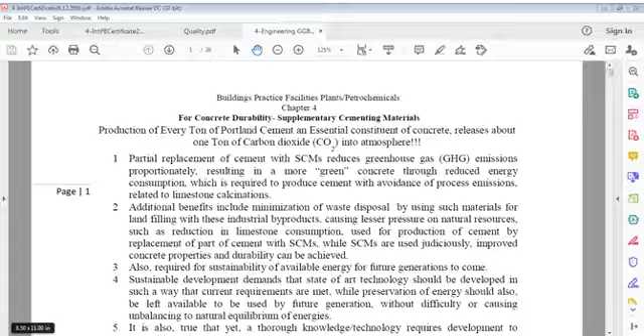COVID is crooked, COVID is a clever entity. It goes to take a cup of tea, takes recess, and goes away for a few days. It comes back again with fresh energy, recharged energy, you can say. When we take a cup of tea for some minutes, for some hour, we feel charged. And that's what COVID does. When it's tired, maybe it goes back to take some coffee or tea, some hot soup, and comes back, and we think it has gone.

But it plays with love. So see, these foolish people, world's foolish people, think it has gone. It's just resting, just trying to sleep for 2 hours, then comes back and attacks you. That's what COVID is doing. We should be clear about that. Well, it's happening. What's happening, nobody can control. No one can control. There's no way we can control this. Whether we control or don't, nothing happens.

Come back to the engineering world. Civil engineering, construction engineering, design engineering, execution engineering, planning engineering, safety engineering, coordination engineering, communication engineering. We have to deal with all these in life. It's not simple engineering, I say. It's social engineering, even in your own daily life. We deal with people, we coordinate with people, we communicate with them. And of course, the computer world has changed everything.

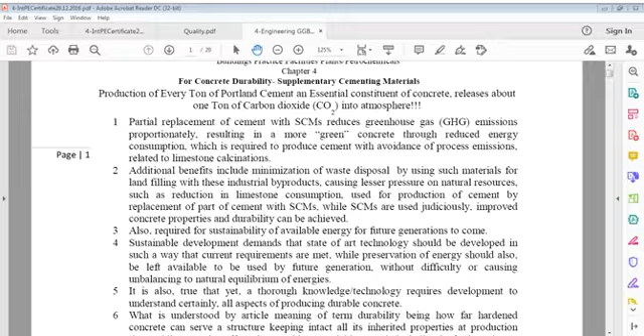Identification may be different, may be difficult, but civil engineering stays there. This point we have to understand very clearly, very well, if you respect civil engineering. People don't like to call themselves civil engineers, they want to call themselves structural engineers. Well, that is, I think, a different kind of mindset.

Engineering for people is important rather than whether you are a structural engineer, or a construction engineer, or a road engineer, or whatever sort of engineer you are. That is your expertise, it doesn't matter. People have to see it that way. People want sound, very strong, durable structures, and that's important.

Your focus should be that, rather than 'I am a structural engineer, I am this engineer, or that engineer'. Well, that's for each individual to see. Important is not your title. Important is your production, your performance.

Performance, as I say, in quality - I can say in quality. Whenever you say what is that, we always say engineering means quality everywhere. When I say quality everywhere, it should be everywhere - not here or there. Everywhere. When I say quality of project, it should be on every member of the project, on every component of the project,

every member of a structure, every discipline of architecture or others in that building or structure. Quality should be everywhere according to requirement, according to contract definitions, according to specifications. Quality must be available everywhere. And it's not only on projects, in life itself there should be quality.

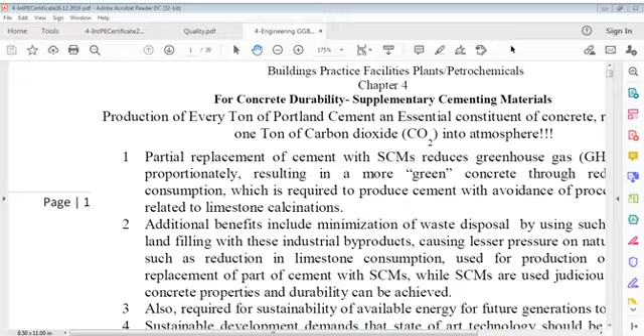And I think it's important, very important. I was talking about yesterday, about supplementary cementing materials. We talked a lot about that, and now accelerators we talked about, fly ash we talked about, and autogenous temperatures, let us say, slump and workability we talked about, and setting time, mechanical properties, strength development, Young's modulus, plasticity, drying shrinkage.

Yes, GGBS, let us say, I think I did not continue this one, right? Let me see, how could I, maybe I remember. Okay, let us talk GGBS now, later.

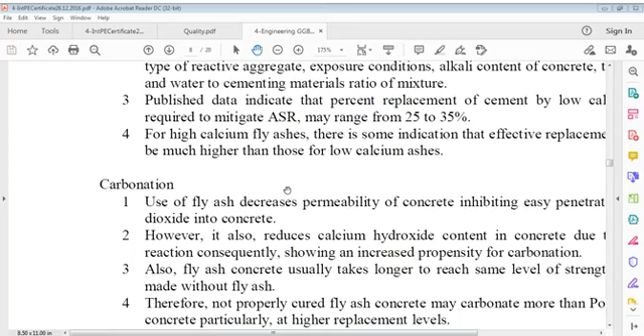We'll talk again on this because this is a very important issue. Let me use this one a little. Let's go back a little. I think I should not run away like this.

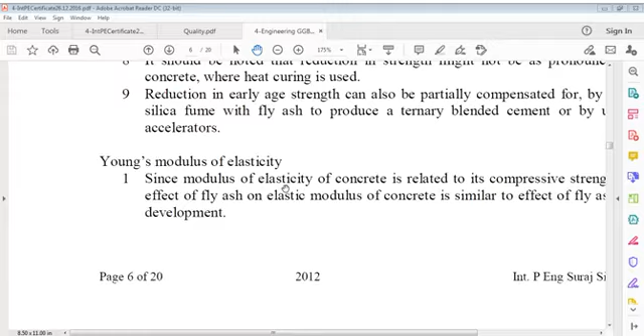Let us say drying shrinkage. Before that, Young's modulus of elasticity. What was it? Strength level, mechanical properties.

Okay, let us read it and go back. What's bleeding? It says bleeding of fly ash concrete depends on the manner in which fly ash is used. When fly ash is used as a direct replacement for cement with no reduction in water content, bleed water of fly ash concrete generally increases. However, when a reduction of water due to use of fly ash as a replacement of cement is made to maintain similar workability, bleed water of resulting fly ash concrete is generally lower than that of concrete made without fly ash. High volume fly ash concrete at low unit water content does not bleed.

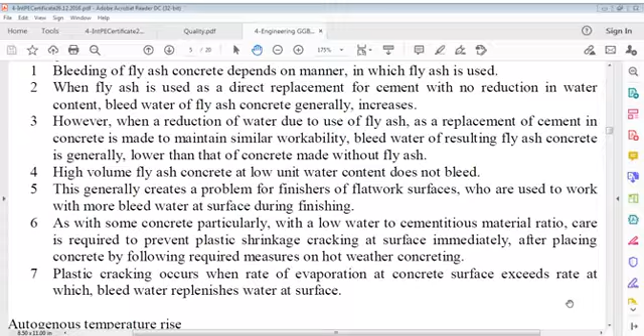This generally creates a problem for those people who work on finishing of surface or flat work surfaces, masons or finishers, who are used to working with more bleed water at the surface during finishing.

As with some concrete, particularly with a low water to cementitious material ratio, care is required to prevent plastic shrinkage cracking at the surface immediately after placing concrete, by following required measures on hot weather concreting. Plastic cracking occurs when the rate of evaporation at the concrete surface exceeds the rate at which bleed water replenishes water at the surface.

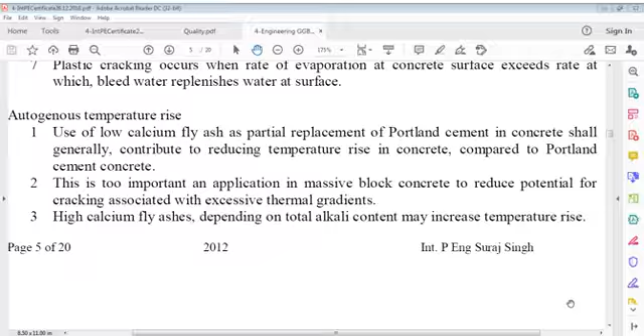Autogenous temperature rise: the use of low calcium fly ash as partial replacement of Portland cement in concrete shall generally contribute to reducing temperature rise compared to Portland cement concrete. This is an important application in massive block concrete, to reduce potential for cracking associated with excessive thermal gradients. High calcium fly ashes, depending on total alkali content, may increase temperature rise. For similar 28 day compressive strength and workability, setting time of fly ash concrete may be longer than normal Portland cement concrete for a given combination of cement and chemical admixtures.

It says for similar 28 day compressive strength and workability attainment, setting time of fly ash concrete may be longer than normal Portland cement concrete for a given combination of cement and chemical admixture. This may influence the schedule for finishing horizontal surfaces, particularly at high levels of replacement if it is more than 30%, and or in cool weather.

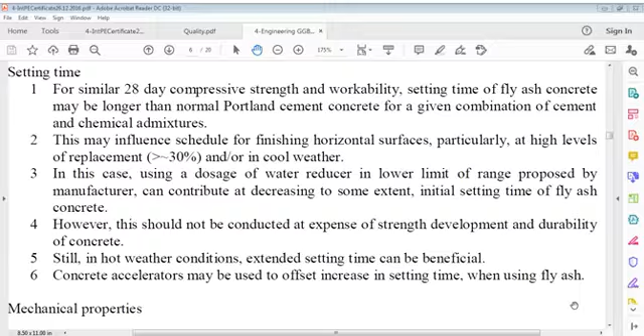In this case, using a dose of water reducer in the lower limit of the range proposed by the manufacturer can contribute to decreasing, to some extent, the initial setting time of fly ash concrete. However, this should not be done at the expense of strength development and durability of concrete. Still, in hot weather conditions, extended setting time can be beneficial. Concrete accelerators may be used to offset increase in setting time when using fly ash.

Now, mechanical properties. Strength development of fly ash concrete is strongly affected by type of fly ash and curing temperature.

Use of low calcium fly ashes generally decreases compressive strength of concrete at early ages up to 28 days, and increases it at later ages due to pozzolanic reaction of fly ash, when compared to Portland cement concrete with similar 28 day compressive strength. On the other hand, use of high calcium content has a marginal effect on strength development.

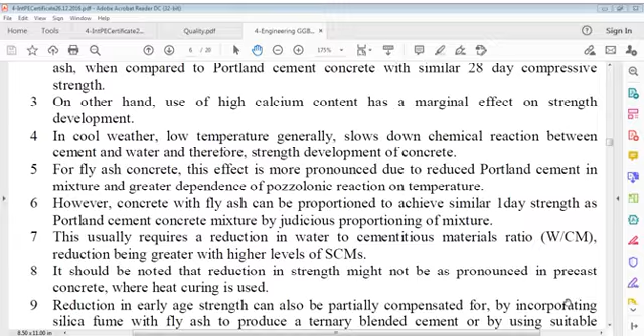In cool weather, low temperature generally slows down the chemical reaction between cement and water, and therefore strength development of concrete. For fly ash concrete, this effect is more pronounced due to reduced Portland cement in the mixture and greater dependence of the pozzolanic reaction on temperature.

However, concrete with fly ash can be proportioned to achieve similar 1-day strength as Portland cement concrete mixture, by judicious proportioning of the mixture. This usually requires a reduction in water to cementitious materials ratio, W/cm, the reduction being greater with a higher level of supplementary cementing materials. It should be noted that this reduction in strength might not be as pronounced in precast concrete where heat curing is used.

Reduction in early age strength can also be partially compensated for by incorporating silica fume with fly ash to produce a ternary blended cement, or by using suitable accelerators. Young's modulus of elasticity: since modulus of elasticity of concrete is related to its compressive strength, in general, the effect of fly ash on elastic modulus of concrete is similar to its effect on strength development.

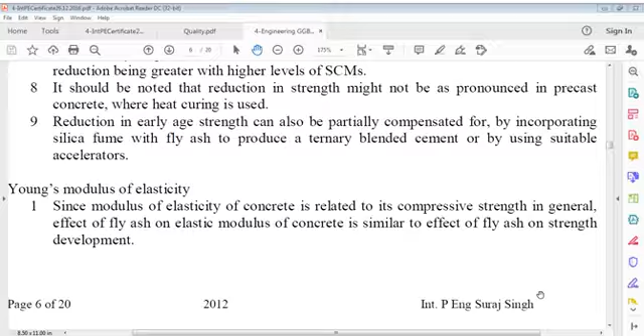Elastic modulus of fly ash concrete is generally lower at early ages, say 28 days, and higher at later ages than that of concrete made without fly ash and having similar 28-day compressive strength.

Drying shrinkage. Effect of fly ash. I'm feeling thirsty, I think. Just a minute, please, let me take some water. I'm feeling thirsty.

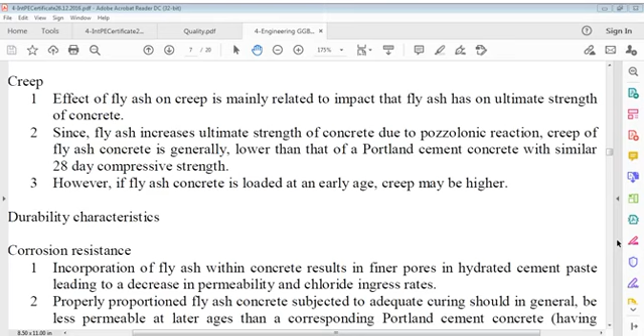Durability. I think you know what is pozzolanic action. We may have a little discussion on that, but let me see if I can find something. Maybe may not be.

Pozzolanic action is a long-term reaction which involves dissolved silicic acid, water, and CaO or Ca(OH)2 or other pozzolans to form a strong cementation matrix. This process is often irreversible. Sufficient amount of free calcium ions, and high pH of 12 are needed.

Pozzolanic reaction overview, let me see. I go to chemical reactions. Just a minute, let us see what happens. It's better sometimes to see, just for refreshing knowledge, it's also important. Modern approaches in material science, chemical reaction pozzolanic concrete. Let us see what it says. I will show you also this better. If you can see this, just for reference only, not for records. I'll just show you something. Let me print out and give it to you. PHP, print out, print, okay.

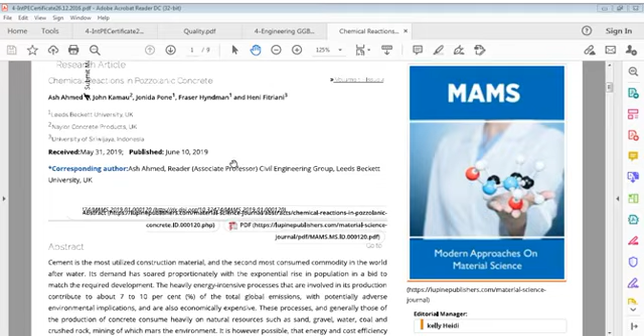So I think I got print out here. This must be somewhere here. Let us see what it says. Let me go through this and see what this you mean by that. It's some material, we'll just read this one better, I think. So anytime we can see this, let us talk on this, and I close other files, otherwise I may find problems, let me see which files are open so that I can close those unnecessary files here. I'll close this and come on to talk to you of this. This is also, there's no meaning of this PHP, so I'll depend on this now. Let us see this, okay, it is which site?

Chemical reactions in concrete, modern approaches, it says cement is most utilized construction material and second most consumed commodity in world after water. Its demand has soared proportionally with exponential rise in population in a bid to match required development. Heavy energy intensive processes that are involved in its production contribute to about 7 to 10% of total global emissions.

With potentially adverse environmental implications, these processes are also economically expensive. These processes, and generally those of production of concrete, consume heavily on natural resources such as sand, gravel, water, coal, and crushed rock, mining of which mars environment. It is, however, possible that energy and cost efficiency can be achieved by reducing amount of clinker and in its place utilizing supplementary cementitious materials, SCMs or pozzolanas, that require less process heating and emit fewer levels of carbon dioxide.

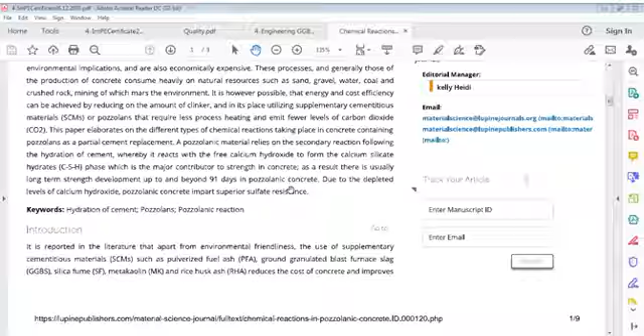In this hydration of cement, pozzolanas are important. It is reported in literature that apart from environmental friendliness, use of supplementary cementitious materials such as pulverized fuel ash (PFA), ground granulated blast furnace slag (GGBS), silica fumes (SF), metakaolin (MK), and rice husk ash (RHA) reduces cost of concrete and improves durability of hardened concrete, thereby enhancing service life of structure.

This focuses on chemical reactions which happen in pozzolanic concrete, that is concrete containing PFA, SF, MK and RHA.

Cement is deemed to have a considerably high carbon footprint, contributing immensely to global anthropogenic carbon dioxide.

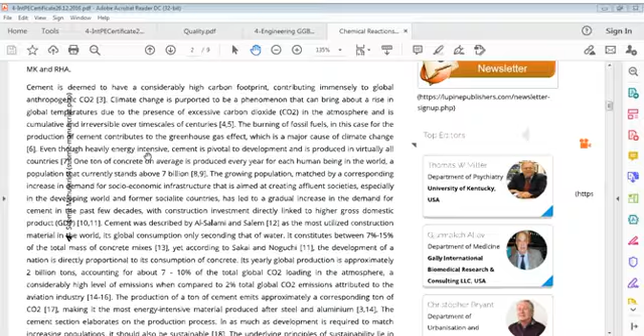Climate change is purported to be a phenomenon that can bring about a rise in global temperature due to presence of excessive carbon dioxide in the atmosphere, and is cumulative and irreversible over time scales of centuries. Burning of fossil fuels, in this case for production of cement, contributes to greenhouse gas effect, which is a major cause of climate change.

Even though heavily energy intensive, cement is pivotal to development and is produced in virtually all countries. On average, 1 ton of concrete is produced every year for each human being in the world. What does 1 ton of concrete mean?

Concrete is 2.5 tons per cubic meter. This means 40% of 1 cubic meter of concrete is produced on average every year for each human being in the world.

A population that currently stands around 7 to 8 billion, a growing population matched by a corresponding increase in demand for socio-economic infrastructure aimed at creating an affluent society, especially in the developing world and former socialist countries, has led to a gradual increase in demand for cement in past few decades, with construction investment directly linked to higher gross domestic product (GDP).

Cement was described by Al-Salami and Salem as the most utilized construction material in the world, its global consumption only seconding that of water. It constitutes between 7 to 15% of the total mass of concrete mixes.

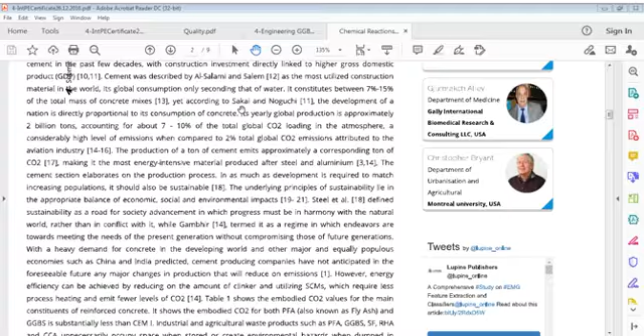Production of a ton of cement emits approximately a corresponding ton of carbon dioxide, making it the most energy intensive material produced after steel and aluminium. The cement section elaborates on the production process.

Inasmuch as development is required to match increasing populations, it should also be sustainable. This principle of sustainability lies in an appropriate balance of economic, social and environmental impacts. Steel et al. defined sustainability as a road for society to advance in which progress must be in harmony with the natural world rather than in conflict with it.

While Gambhir termed it as a regime in which endeavors are towards meeting the needs of the present generation without compromising those of future generations, with a heavy demand for concrete in the developing world and other major and equally populous economies such as China and India predicted, cement producing companies have not anticipated in the foreseeable future any major changes in production that will reduce emissions. However, energy efficiency can be achieved by reducing the amount of clinker and utilizing SCMs, which require less process heating and emit fewer levels of carbon dioxide.

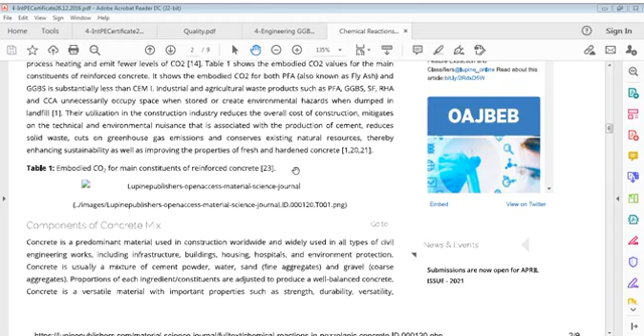There's a table showing embodied carbon dioxide for PFA (fly ash) and GGBS is substantially less than CEM. Industry and agricultural waste products such as PFA, GGBS, RHA, and CCA unnecessarily occupy space when stored or create environmental hazards when dumped in landfill. Their utilization in construction reduces overall cost of construction, mitigates technical and environmental nuisance associated with cement production, reduces solid waste, cuts greenhouse gas emissions, and conserves natural resources, enhancing sustainability and improving properties of fresh and hard concrete.

Concrete is a predominant material used in construction worldwide and widely used in all types of civil engineering works, including infrastructure, buildings, housing, hospitals, and environment protection. Concrete is usually a mixture of cement powder, water, sand (fine aggregate), and gravel (coarse aggregate). Proportions of each ingredient are adjusted to produce a well-balanced concrete. Concrete is a versatile material with important properties such as strength, durability, versatility, affordability, fire resistance, and thermal mass. Furthermore, it's locally produced and utilized in all countries.

The most common type of cement, used in combination with other materials to form different types of concrete, is Portland cement. Portland cement is produced by burning a mixture of calcium carbonate, called limestone or chalk, and an aluminosilicate, that's clay or shale. The product is then ground with approximately 5% gypsum to produce cement. Cement is a material which binds together solid bodies, or aggregate, by hardening from a plastic state.

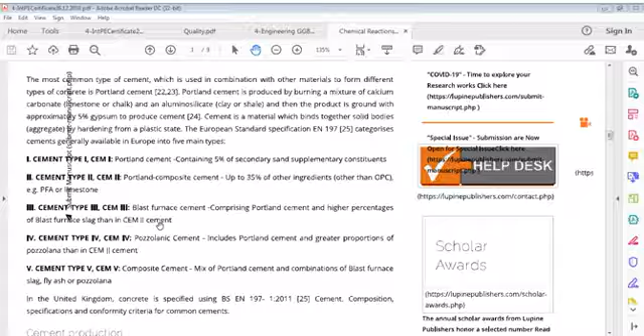European standard specification EN197 categorizes cement generally available in Europe into 5 main types: type 1 cement, type 2 cement, type 3 cement, and so on.

Type 1 is Portland cement containing 5% secondary supplementary constituents. Type 2, or CEM 2, is Portland composite cement with up to 35% of other ingredients besides OPC, such as PFA or limestone. Cement type 3 is blast furnace cement, comprising Portland cement with higher percentages of blast furnace slag than CEM 2. Cement type 4 is pozzolanic cement, including Portland cement with greater portions of pozzolana than CEM 2. Cement type 5 is composite cement, a mix of Portland cement with combinations of blast furnace slag, fly ash, and pozzolana.

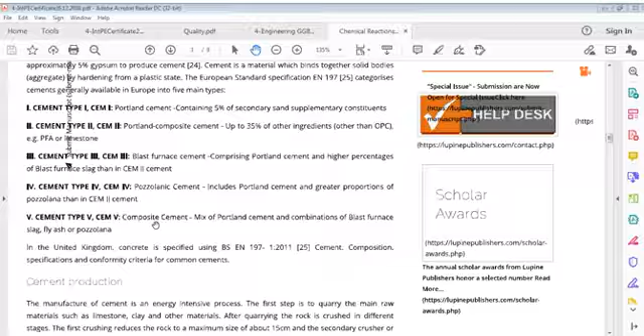So these are the 5 types: Cement 1 contains just 5% secondary sand. Cement 2 is Portland cement comprising 35% ingredients other than OPC. Type 3 is blast furnace slag cement, with higher percentages of blast furnace slag. Cement 4 is pozzolanic cement, with greater proportions of pozzolana than cement 2. Cement type 5 is composite cement, a mix of Portland cement with blast furnace slag, fly ash, and pozzolana. In the United Kingdom, concrete is specified using BS EN 197, which covers cement composition, specifications, and conformity criteria for common cements.

Manufacture of cement is an energy intensive process. The first step is to quarry the main raw materials such as limestone, clay, and other materials. After quarrying, the rock is crushed in different stages: first crushing reduces rock to a maximum size of about 15 centimeters, and a secondary crusher or hammer mill reduces it further to about 7.5 centimeters or smaller.

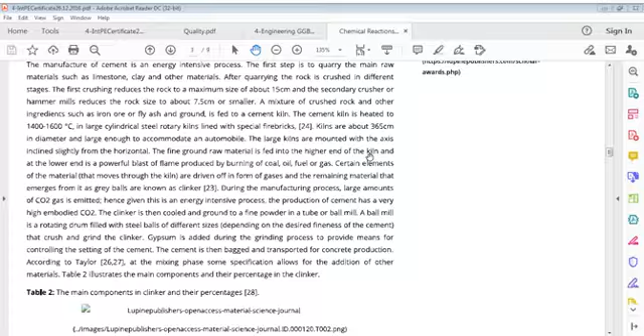A mixture of crushed rock and other ingredients such as iron ore or fly ash is ground and fed into a cement kiln. The kiln is heated to 1400 to 1600 degrees Celsius in large cylindrical steel rotary kilns lined with special fire bricks. Kilns are about 365 centimeters in diameter, large enough to accommodate an automobile, and mounted with their axis inclined slightly from horizontal. Fine ground raw material is fed into the higher end of the kiln, and at the lower end is a powerful blast of flame produced by burning coal, oil, fuel, or gas.

Certain elements of the material moving through the kiln are driven off as gases, and the remaining material that emerges as grey balls is known as clinker. During this manufacturing process, large amounts of carbon dioxide gas are emitted. Hence, given this energy intensive process, production of cement has a very high embodied carbon dioxide footprint. The clinker is then cooled and ground to fine powder in a tube or ball mill.

The ball mill is a rotating drum filled with steel balls of different sizes, depending on the desired fineness of cement, that crush and grind the clinker. Gypsum is added during the grinding process to provide a means for controlling the setting time of cement. The cement is then bagged and transported for concrete production. According to Taylor, at the mixing phase, some specifications allow for the addition of other materials.

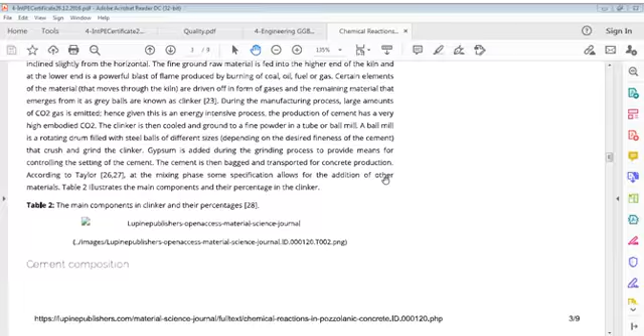There are four main chemical compounds present in Portland cement whose proportions in the mix affect the properties of the resulting cement. These compounds are tricalcium silicate, dicalcium silicate, tricalcium aluminate and tetracalcium aluminoferrite. Their properties are shown in the table, the typical composition of Portland cement.

Tricalcium silicate, C3S: water reacts rapidly with it to produce a large amount of heat, an exothermic reaction, forming calcium silicate hydrates. These have high strength and contribute most to the early strength of cement hydrates.

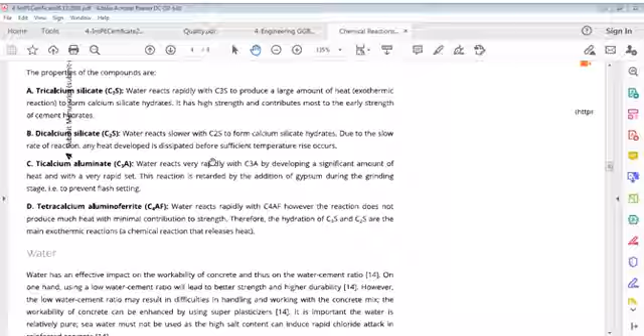Dicalcium silicate, C2S: water reacts slower with C2S to form calcium silicate hydrates. Due to the slow rate of reaction, whatever heat is developed is dissipated before a sufficient temperature rise occurs.

Tricalcium aluminate, C3A: water reacts very rapidly with C3A, developing a significant amount of heat and a very rapid set. This reaction is retarded by the addition of gypsum during the grinding stage to prevent flash setting.

Tetracalcium aluminoferrite, C4AF: water reacts rapidly with C4AF, however the reaction doesn't produce much heat, with minimal contribution to strength.

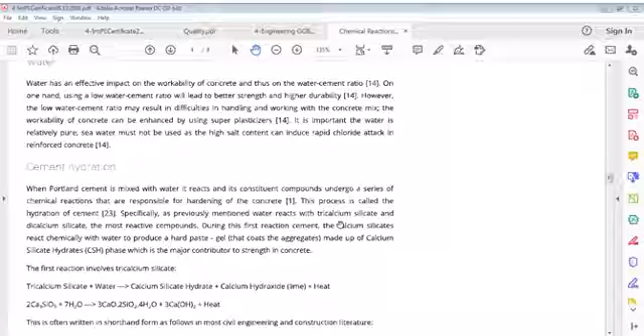Water has an effective impact on the workability of concrete and thus on the water cement ratio. Using a low water cement ratio leads to better strength and higher durability, however it may result in difficulties handling and working with the concrete mix. Workability can be enhanced using superplasticizers. It is important that water is relatively pure; seawater must not be used as high salt content can induce rapid chloride attack in reinforced concrete.

When Portland cement is mixed with water, it reacts and its constituent compounds undergo a series of chemical reactions responsible for the hardening of concrete. This process is called hydration of cement. Specifically, water reacts with tricalcium silicate and dicalcium silicate, the most reactive compounds.

During this first reaction, calcium silicate reacts chemically with water to produce a hard paste gel that coats the aggregate, made up of calcium silicate hydrates phase, which is the major contributor to the strength of concrete.

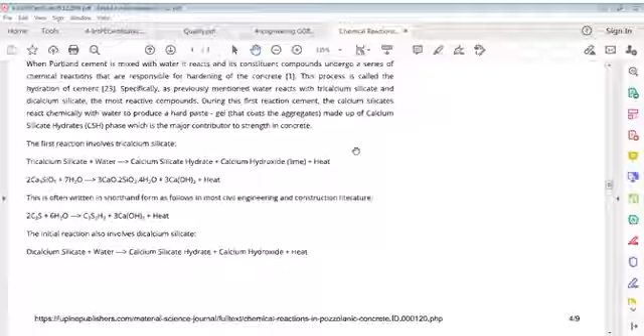The first reaction involves tricalcium silicate: tricalcium silicate plus water gives calcium silicate hydrate plus calcium hydroxide (lime) plus heat. That is 2Ca3SiO5 plus 7H2O gives 3CaO·2SiO2·4H2O plus 3Ca(OH)2 plus heat. This is often written in shorthand form as follows, in most civil engineering and construction literature: 2C3S plus 6H2O gives C3S2H3 plus 3CH plus heat.

The initial reaction also involves dicalcium silicate: dicalcium silicate plus water gives calcium silicate hydrate plus calcium hydroxide plus heat. That is 2Ca2SiO4 plus 5H2O gives 3CaO·2SiO2·4H2O plus Ca(OH)2 plus heat, often written in shorthand form as: 2C2S plus 4H2O gives C3S2H3 plus CH plus heat.

During hydration of cement, there is also formation of lime, calcium hydroxide. Both reactions are exothermic, meaning heat is released during the reaction process.

Tricalcium silicate and dicalcium silicate are the main contributors to compressive strength in concrete.

According to Darwin, when tricalcium silicate is first mixed with water, for the first 15 minutes a rapid evolution of heat occurs, known as stage 1. Then for the next 2 to 4 hours follows a relative inactivity known as the induction or dormant period. Portland cement concrete remains in a plastic state for several hours due to this prolonged phase of inactivity.

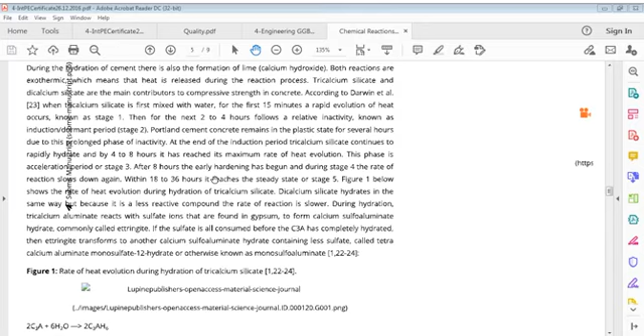At the end of the induction period, tricalcium silicate continues to rapidly hydrate, and by 4 to 8 hours it reaches its maximum rate of heat evolution. This phase is the acceleration period, or stage 3. After 8 hours, early hardening has begun, and during stage 4 the rate of reaction slows down again. Within 18 to 36 hours, it reaches steady state, or stage 5.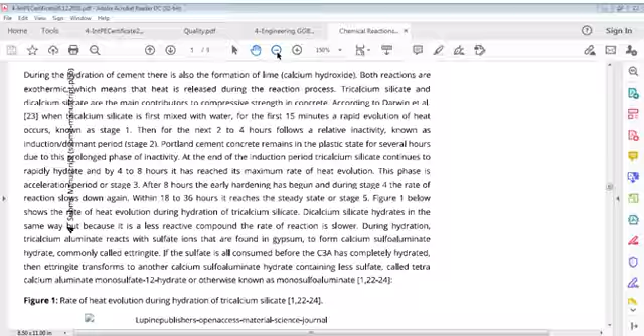So I was talking about this issue during hydration of cement. Here's an interesting statement: formation of lime, that is hydration of cement and water, forms calcium hydroxide, CH. Both reactions are exothermic, meaning heat is released during the reaction process. Tricalcium silicate and dicalcium silicate are the main contributors.

Tricalcium silicate and dicalcium silicate are the main contributors for compressive strength. When tricalcium silicate is first mixed with water, for the first 15 minutes they combine and rapid evolution of heat occurs, known as stage 1.

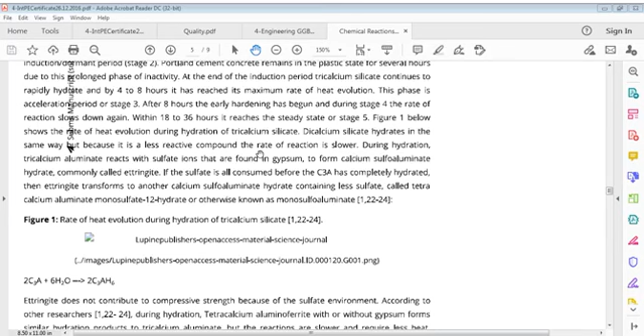I will not go into further detail since that's not the objective of this talk, but you can see that 2C3A plus 6H2O goes to 2C3AH6. Ettringite does not contribute to compressive strength, because of the sulfate environment.

According to other researchers, during hydration tetracalcium aluminoferrite, with or without gypsum, forms hydration products similar to tricalcium aluminate, but the reactions are slower and require less heat. Concrete containing 100% cement usually reaches its maximum strength within 28 days, hence this is usually taken as the reference point for most projects using concrete.

Most supplementary cementing materials, SCMs, are pozzolans. However, it's important to differentiate between a direct cement replacement and a pozzolan. A direct cement replacement is a type of cement substitute that can replace Portland cement without requiring the pozzolanic activity reaction discussed below. The most common type of these replacements is ground granulated blast furnace slag, GGBS, which is a byproduct of the iron and steel industry.

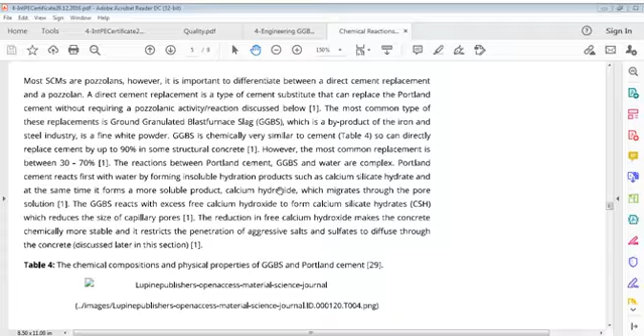GGBS is a fine white powder, chemically very similar to cement, so you can directly replace cement by up to 90% in some structural concrete. However, the most common replacement is between 30 to 70%.

Reactions between Portland cement, GGBS and water are complex. Portland cement reacts first with water, forming insoluble hydration products such as calcium silicate hydrate, and at the same time forms a more soluble product, calcium hydroxide, which migrates through the pore solution. GGBS reacts with the excess free calcium hydroxide.

Again: Portland cement reacts first with water, forming insoluble hydration products such as calcium silicate hydrate, and at the same time forms a more soluble product, calcium hydroxide, which migrates through the pore solution. GGBS reacts with the excess free calcium hydroxide to form calcium silicate hydrates, CSH, which reduces the size of the capillary pores.

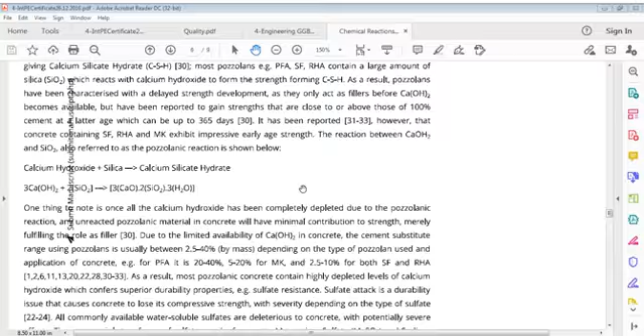The reaction between Ca(OH)2 and SiO2, also referred to as the pozzolanic reaction, is shown below: calcium hydroxide plus silica gives calcium silicate hydrate - 3Ca(OH)2 plus 2SiO2 gives 3CaO, 2SiO2, 3H2O.

One thing to note is that once all calcium hydroxide has been completely depleted due to the pozzolanic reaction, unreacted pozzolanic material in concrete will have minimal contribution to strength, merely fulfilling the role of a filler.

Due to limited availability of Ca(OH)2 in concrete, cement substitute range using pozzolanas is usually between 2.5 to 40% by mass, depending on type of pozzolana used and application of concrete. For PFA it is 20 to 40%, 5 to 20% for MK (metakaolin), and 2.5 to 10% for both silica fumes and RHA.

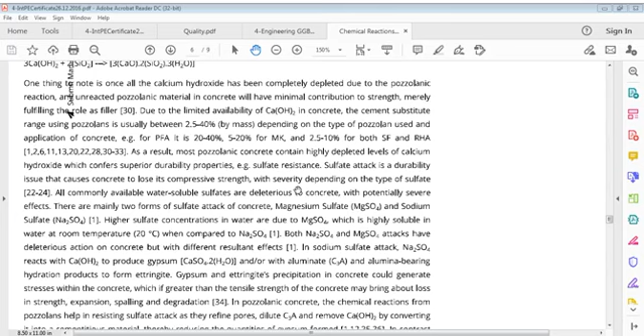As a result, most pozzolanic concrete contain highly depleted levels of calcium hydroxide, which confers superior durability properties, namely sulfate resistance.

Sulfate attack is a durability issue that causes concrete to lose its compressive strength, with severity depending on type of sulfate. All commonly available water-soluble sulfates are deleterious to concrete with potentially severe effects.

There are mainly two forms of sulfate attack on concrete: magnesium sulfate MgSO4 and sodium sulfate Na2SO4. Higher sulfate concentrations in water are due to MgSO4, which is highly soluble in water at room temperature, 20 degrees Celsius, when compared to Na2SO4. Both Na2SO4 and MgSO4 attacks have deleterious actions on concrete, but with different resultant effects.

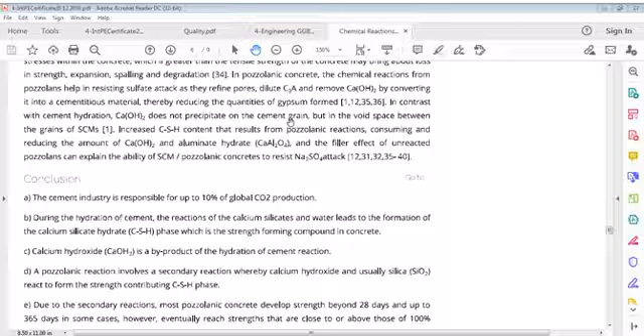The conclusion here, a small conclusion, is that the cement industry is responsible for up to 10% of global carbon dioxide production.

During hydration of cement, reactions of calcium silicates and water lead to formation of calcium silicate hydrate (CSH) phase, which is the strength-forming compound in concrete. Calcium hydroxide Ca(OH)2 is a byproduct of the hydration of cement reaction.

A pozzolanic reaction involves a secondary reaction whereby calcium hydroxide and usually silica (SiO2) react to form strength-contributing CSH phase. Due to secondary reactions, most pozzolanic concrete develops strength beyond 28 days and up to 365 days in some cases, eventually reaching strengths close to or above those of 100% cement.

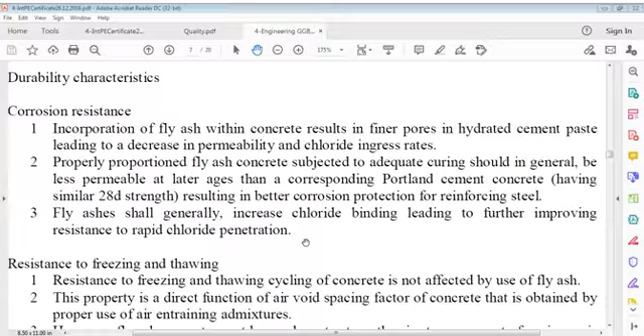Resistance to freezing and thawing cycling of concrete is not affected by use of fly ash. This property is a direct function of the air void spacing factor of concrete, obtained by proper use of air entraining admixtures. Fly ash concrete must have adequate strength prior to exposure to freezing, as is the case for normal Portland cement concrete.

Resistance to de-icing salts scaling: laboratory test data indicates that fly ash concrete containing more than about 25% fly ash is less resistant to de-icing salt scaling than Portland cement concrete. However, some field data have shown acceptable performance of concrete incorporating more than 40 to 50% fly ash.

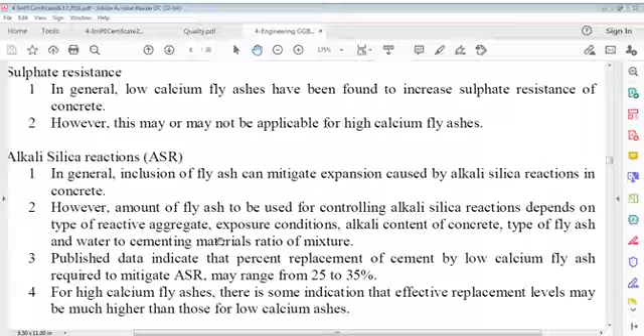Sulfate resistance: in general, low calcium fly ashes have been found to increase sulfate resistance of concrete. However, this may or may not be applicable for high calcium fly ashes.

Alkali silica reactions: in general, inclusion of fly ash can mitigate expansion caused by alkali silica reactions in concrete. The amount of fly ash to be used for controlling alkali silica reactions depends on type of reactive aggregate, exposure conditions, alkali content of concrete, type of fly ash, and water to cementing materials ratio of mixture.

Published data indicates that percent replacement of cement by low calcium fly ash required to mitigate alkali silica reaction may range from 25 to 35%. For high calcium fly ashes, there is some indication that effective replacement levels may be much higher than those for low calcium ashes.

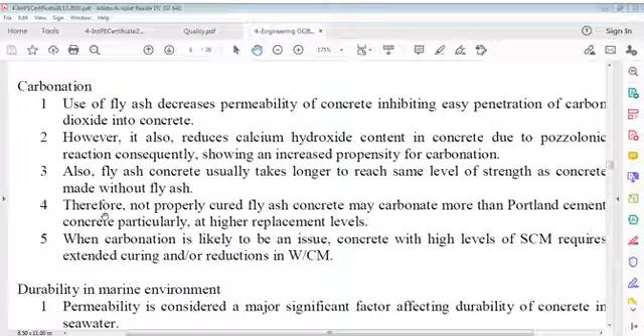Therefore, not properly cured fly ash concrete may carbonate more than Portland cement concrete, particularly at higher replacement levels. When carbonation is likely to be an issue, concrete with higher levels of SCM requires extended curing and/or reducing the water cementing ratio. Water cementing ratio reduction is not that easy, but intensive, long-term curing can be possible.

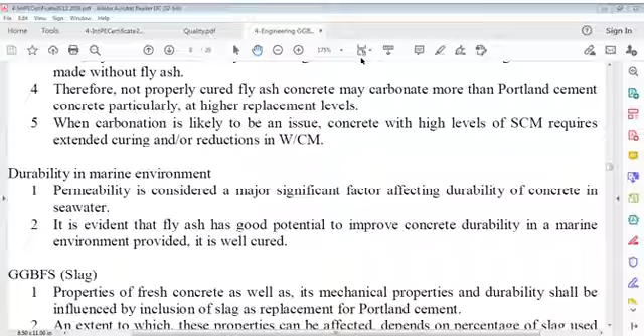When carbonation is likely to be an issue, concrete with high levels of supplementary cementing material requires extended curing and/or reduction in water cementitious material. Durability in marine environment.

Permeability is considered a major significant factor affecting durability of concrete in seawater. It's evident that fly ash has good potential to improve concrete durability in a marine environment, provided it is well cured.

Now, slag, GGBS. Properties of fresh concrete as well as mechanical properties and durability shall be influenced by inclusion of slag as replacement for Portland cement. The extent to which these properties can be affected depends on the percentage of slag used and its fineness. This description outlines the manner in which replacement of Portland cement by slag affects properties of concrete.

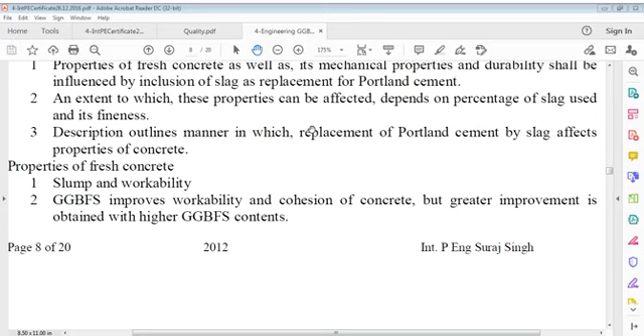Properties of fresh concrete: slump and workability. GGBS improves workability and cohesion of concrete, but greater improvement is obtained with higher GGBS content. High value of fine GGBS doesn't improve workability of concrete.

Bleeding: use of slag does not have a significant influence on bleeding of concrete. Autogenous temperature rise: use of slag may reduce autogenous temperature rise in concrete elements as well as the associated risk of thermal stress and cracking, if sufficiently large percentages of slag are used as partial replacement for Portland cement, at least 50%, provided slag is not ground to very high fineness, that is greater than 6000 Blaine.

Again, this is a very important one. The use of slag may reduce autogenous temperature rise in concrete elements as well as associated risk of thermal stress and cracking, if a sufficiently large percentage of slag is used as partial replacement for Portland cement, to at least 50%, provided slag is not ground to a very high fineness greater than 6000 Blaine. Higher levels of replacement, greater than 65%, may be required for concrete in warm weather conditions.

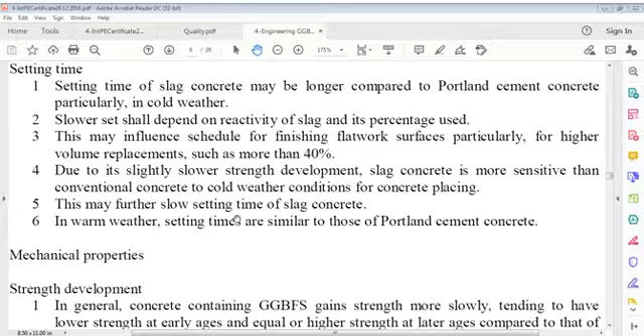Setting time: setting time of slag concrete may be longer compared to Portland cement concrete, particularly in cold weather. Slower set shall depend on reactivity of slag and the percentage used. This may influence the schedule for finishing flatwork surfaces, particularly for higher volume replacements such as more than 40%. Due to its slightly slower strength development, slag concrete is more sensitive than conventional concrete to cold weather conditions for concrete placing, which may further slow the setting time of slag concrete. In warm weather, setting times are similar to those of Portland cement concrete.

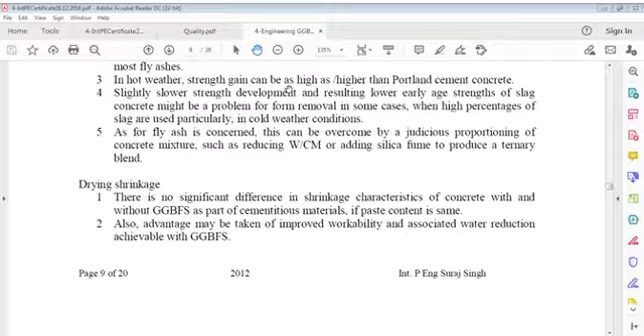Drying shrinkage: there is no significant difference in shrinkage characteristics of concrete with and without GGBS as part of the cementitious material, if the paste content is the same. Also, advantage may be taken of improved workability and associated water reduction achievable with GGBS.

Creep. GGBS appears to reduce creep due to increase of ultimate strength and elastic modulus of concrete with GGBS. However, if concrete is loaded at early ages, creep might be higher than that of Portland cement concrete due to lower gain of early age strength of concrete with GGBS.

Durability characteristics. Inclusion of GGBS in concrete increases its resistance to chloride ion penetration, particularly at later ages. It also improves chloride binding, which is very advantageous for protecting reinforcing steel from corrosion, for which slag concrete should be well cured, as is applicable for fly ash concrete.

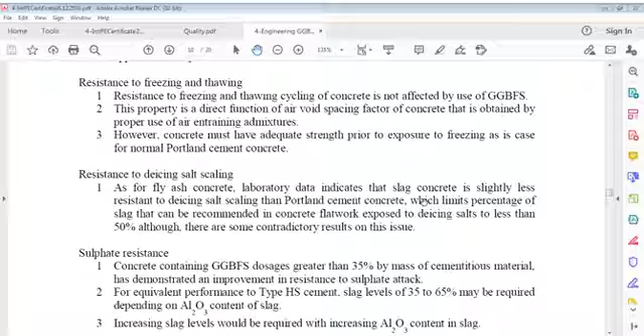Resistance to freezing and thawing cycling of concrete is not affected by use of GGBS. This property is a direct function of the air void spacing factor of concrete, which is obtained by proper use of air entraining admixtures. Concrete must have adequate strength prior to exposure to freezing, as is the case for normal Portland cement concrete.

Resistance to de-icing salt scaling. As for fly ash concrete, laboratory data indicates that slag concrete is slightly less resistant to de-icing salt scaling than Portland cement concrete, which limits the percentage of slag that can be recommended in concrete flat work exposed to de-icing salt to less than 50%, although there are some contradictory results on this.

Again, as valid for fly ash concrete, laboratory data indicates that slag concrete is slightly less resistant to de-icing salt scaling than Portland cement concrete, which limits the percentage of slag that can be recommended in concrete flat work exposed to de-icing salts to less than 50%, although there are some contradictions.

Sulfate resistance. Concrete containing GGBS dosages greater than 35% by mass of cementitious material has demonstrated an improvement in resistance to sulfate attack. For equivalent performance to type HS cement, slag levels of 35 to 65% may be required depending on the Al2O3 content of slag. Increasing slag levels would be required with increasing Al2O3 content in slag.

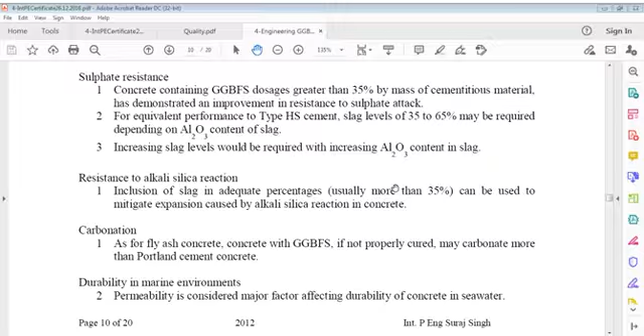Resistance to alkali-silica reactions. Inclusion of slag in adequate percentages, usually more than 35%, can be used to mitigate expansion caused by alkali-silica reaction in concrete.

Carbonation. As for fly ash concrete, GGBS concrete, if not properly cured, may carbonate more than Portland cement concrete.

Durability in marine environment. Permeability is considered a major factor affecting durability of concrete in seawater. Therefore, it is evident that GGBS has potential to improve concrete durability in marine environment, particularly given slag performance in chloride environment.

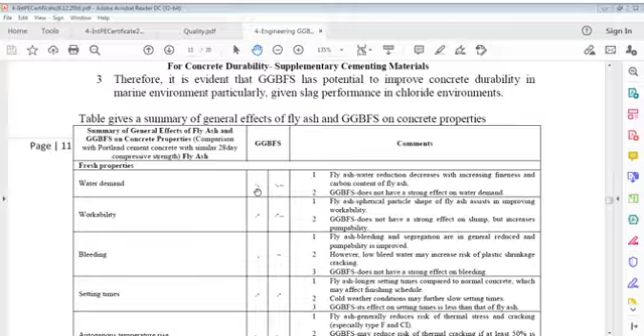Now there is a table that gives a summary of the general effects of fly ash and GGBS on concrete properties. Let's go through this for a better understanding. This reference, I don't actually remember which one I took this from. Well, no problem. The table covers general effects of fly ash and GGBS on concrete properties, in comparison with Portland cement concrete at similar 28-day compressive strength, with comments for both fly ash and GGBS.

Water demand, a fresh property. In both cases: for fly ash, water reduction decreases with increasing fineness and carbon content of fly ash. GGBS does not have a strong effect on water demand.

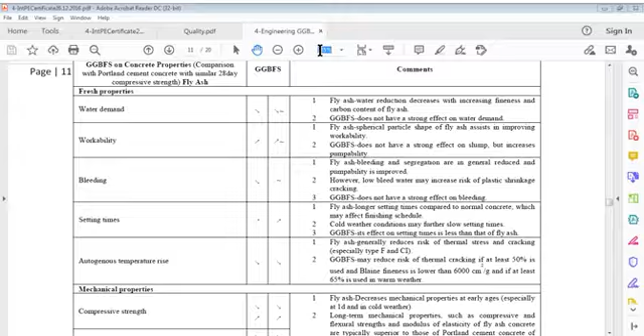Workability. In case of fly ash, the spherical particle shape of fly ash assists in improving workability. In case of GGBS, it does not have a strong effect on slump but increases pumpability.

Bleeding. For fly ash, bleeding and segregation are in general reduced and pumpability is improved. However, low bleed water may increase risk of plastic shrinkage cracking. For GGBS, it does not have a strong effect on bleeding. Setting time.

In case of fly ash, longer setting times compared to normal concrete may affect the finishing schedule. Cold weather conditions may further slow setting times. For GGBS, its effect on setting time is less than that of fly ash.

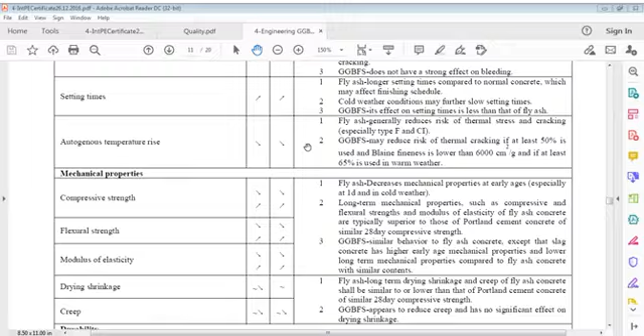Autogenous temperature. Fly ash generally reduces risk of thermal stresses and cracking, especially type F and CI. GGBS may reduce risk of thermal cracking if at least 50% is used and blaine fineness is lower than 6000 centimeters square per gram, and if at least 65% is used in warm weather.

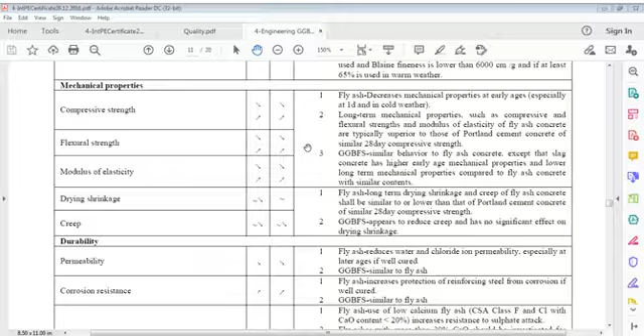Mechanical properties: compressive strength, flexural strength, modulus of elasticity, drying shrinkage, creep. These, along with what we discussed before as fresh properties, make up the mechanical properties.

Compressive strength with fly ash decreases mechanical properties at early ages, especially one day and in cold weather. Long-term mechanical properties such as compressive and flexural strengths and modulus of elasticity of fly ash concrete are typically superior to those of Portland cement concrete of similar 28-day compressive strength.

With GGBS, similar behavior to fly ash concrete is observed, except that slag concrete has higher early age mechanical properties and lower long-term mechanical properties compared to fly ash concrete with similar contents.

Drying shrinkage: fly ash long-term drying shrinkage and creep of fly ash concrete shall be similar to or lower than Portland cement concrete of similar 28-day compressive strength. GGBS appears to reduce creep and has no significant effect on drying shrinkage.

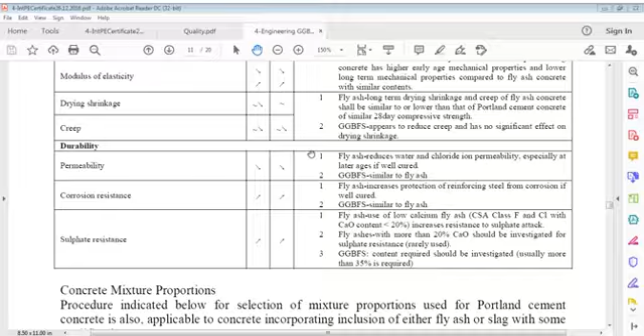Durability covers permeability, corrosion resistance, and sulfate resistance. On permeability, fly ash reduces water and chloride ion permeability, especially at later ages if well cured. GGBS is similar to fly ash.

Corrosion resistance: fly ash increases potential protection of reinforcing steel from corrosion if well cured. GGBS is similar to fly ash.

Sulfate resistance: use of low calcium fly ash, CSA class F and CI, with CaO content less than 20%, increases resistance to sulfate attack. Fly ashes with more than 20% CaO should be investigated for sulfate resistance and are rarely used. For GGBS, the content required should be investigated, usually more than 35% is required.

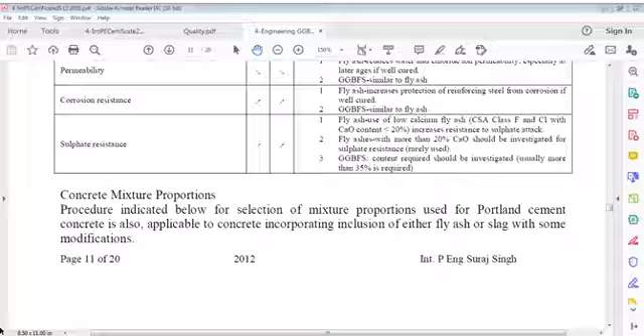Concrete mixture proportions: the procedure indicated below for selection of mixture proportions used for Portland cement concrete is also applicable to concrete incorporating fly ash or slag, with some modifications.

For concrete durability, supplementary cementing materials, let's see this also.

For concrete durability, supplementary cementing materials: estimation of mixing water and selection of air content, selection of water to cementitious materials ratio to meet durability and strength parameters, calculation of cement content, calculation of coarse aggregate content, calculation of fine aggregate content, selection of admixture doses and rates, adjustments for aggregate moisture, and trial batch adjustments.

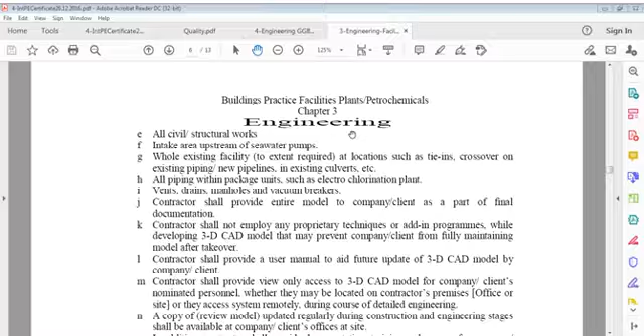Very important point that we must cover. We've gone through this file already, I think, with the new requirements. No, we have not gone through this. We have to go through this. This is chapter 3, and if you see chapter 4, chapter 3 is already open. Chapter 4 is open.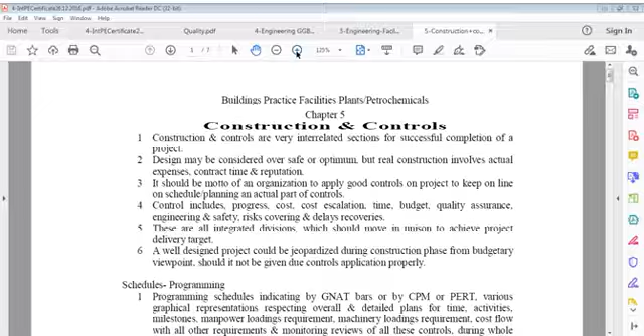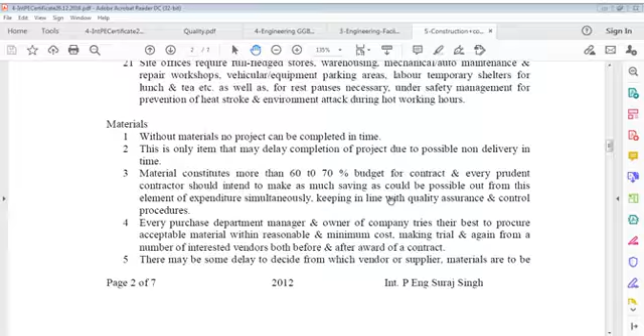Chapter five is construction controls, facilities, petrochemicals. Construction and control. Mobilization, so this is also a very important chapter. We'll take this up also. Let's take this, we are doing this one, and it was saying it will continue like this. Page 12 is also detailed. Sorry gentlemen, I'm yawning.

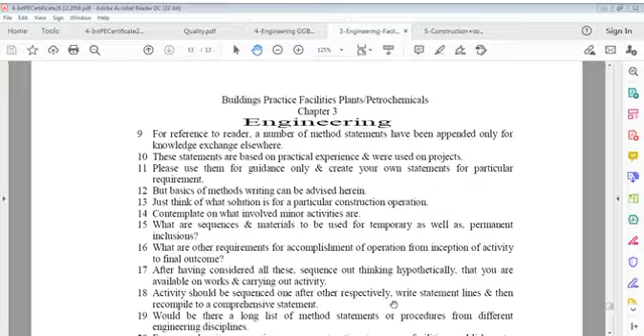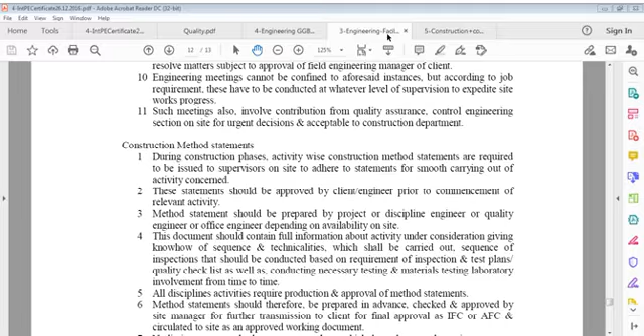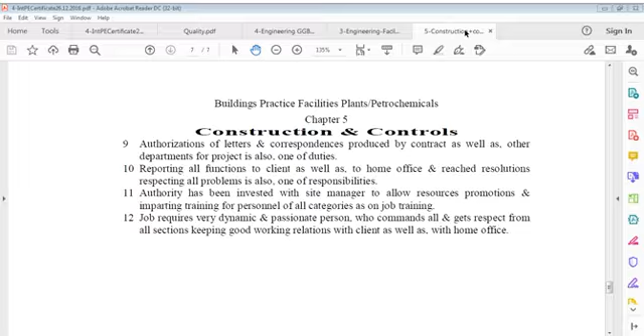Its file says, or the front, I think. Yes, that's the file, that's the file. Engineering facilities. Not this one, this one I think. No, engineering facilities, this was this one. This is the file I actually opened. That one, so engineering facilities. What is that? Let us see what the facility is about. Company and engineering, all that we see, general requirement. This is file number 3. Okay, this is also important. And we have the construction file, construction controls. We have these files here. Facilities file 3.

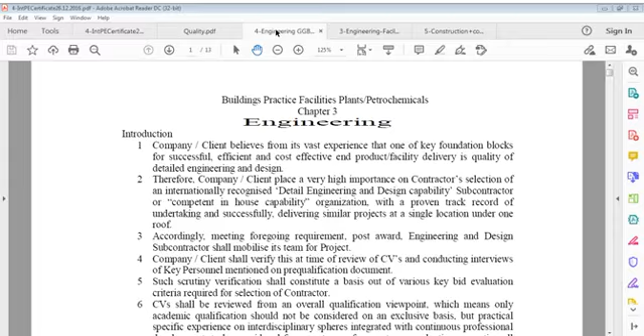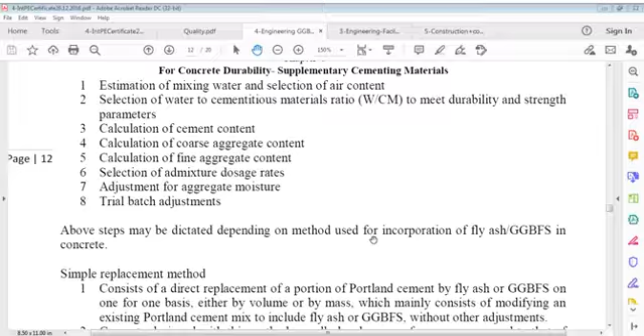These steps depend on the method used for incorporation of fly ash or GGBS in concrete: estimation of mixing water and selection of air content, selection of water cement ratio, calculation of cement content, coarse aggregate, fine aggregate, admixture dosage rates, aggregate moisture, and trial batch adjustments. These steps may be dictated depending on the method used for incorporation of fly ash or GGBS in concrete.

The simple replacement method consists of a direct replacement of a portion of Portland cement by fly ash or GGBS on a one-for-one basis, either by volume or by mass, which mainly consists of modifying an existing Portland cement mix to include fly ash or GGBS without other adjustments. Concrete designed with this method usually has lower performance compared to concrete made with Portland cement only.

The modified replacement method consists of developing fly ash or GGBS concrete mixtures with similar workability and similar compressive strength to that of Portland cement concrete at a specified age. In general, such concretes have a higher total weight of cementitious materials and lower water cement ratio than Portland cement concrete.

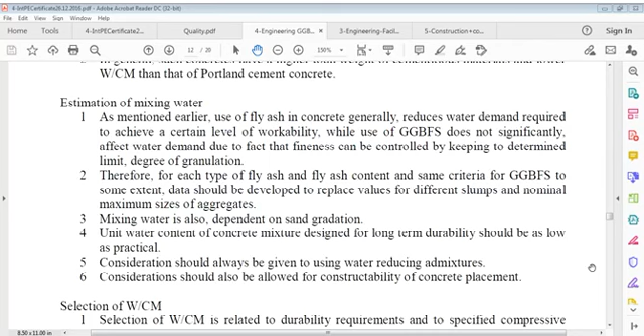As mentioned earlier, use of fly ash in concrete generally reduces water demand required to achieve a certain level of workability, while use of GGBS does not significantly affect water demand due to the fact that fineness can be controlled by keeping to a determined limited degree of granulation for each type of fly ash and fly ash content, and same criteria for GGBS to some extent. Data should be developed to replace values for different slumps and nominal maximum size of aggregates.

Mixing water is also dependent on sand gradation. Unit water content of concrete mixture designed for long-term durability should be as low as practical. Consideration should always be given to using water reducing admixtures, and also for constructability of concrete placement.

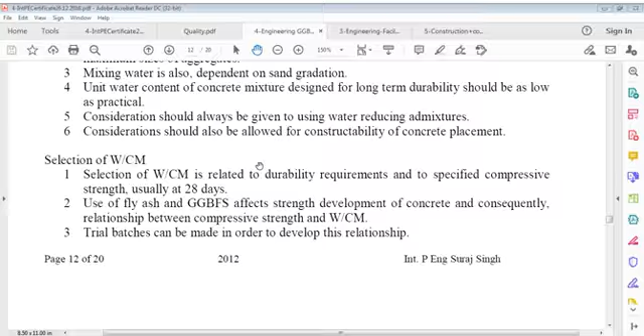Selection of water cementing material is related to durability requirements and to specified compressive strength, usually at 28 days. Use of fly ash and GGBS affects strength development of concrete, and consequently the relationship between compressive strength and water cement ratio, cementing material ratio. Trial batches can be made in order to develop this relationship.

Design of laboratory program would preferably use a factorial design optimization method, that provides a minimum of well-planned trial batches, with the possibility to explore a large range of compositions.

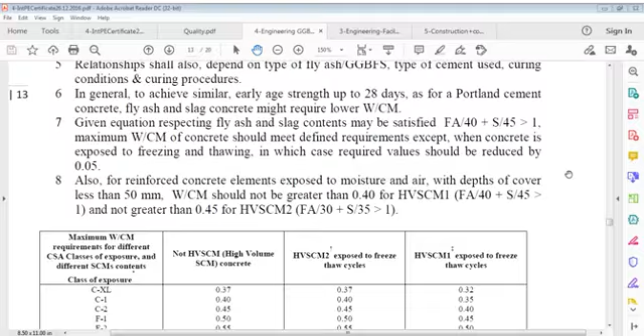For HVSCM1, that is Fa over 40 plus S over 45 greater than 1, it should not be greater than 0.40. For HVSCM2, Fa over 30 plus S over 35 greater than 1. We'll take this up later on.

After all, quality everywhere is important here. Quality everywhere is a very important factor, you have to consider quality, everywhere, in every material, in every action, in every statement, performance, time, everywhere it should be. Everything is analysis we are doing, we are talking about, it's all analysis, and of course thinking based on whatever we have. So we should go like this, only way, no other way out, can't go somewhere else.

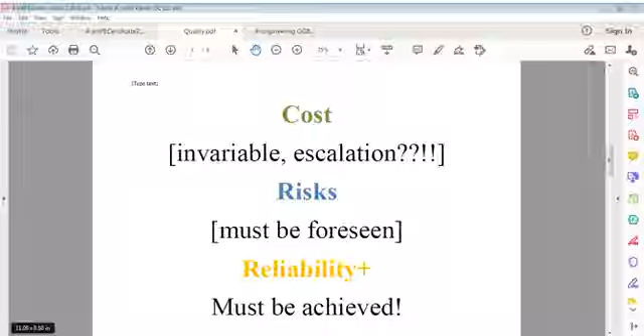We've already gone through this to some extent. Then how far we have gone, we are not going to totally... very important one.

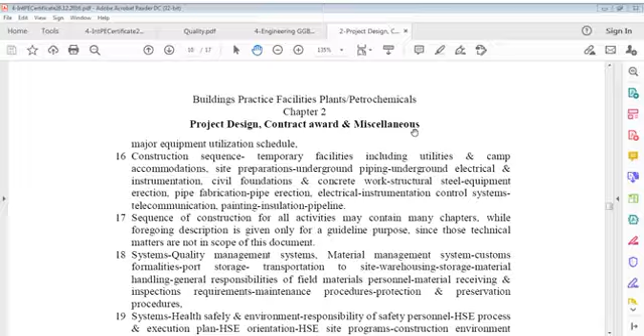We have to understand what we know. So we have studied today about PFA, SCM, and details on paper of PFA, and also the SCM, that is GGBS. We have to grasp all this, it's very important from every point of view. You cannot just jump on, but understand the details of this for a better grasp rather than just running and running. Running is not our style, so later on we'll talk about this.